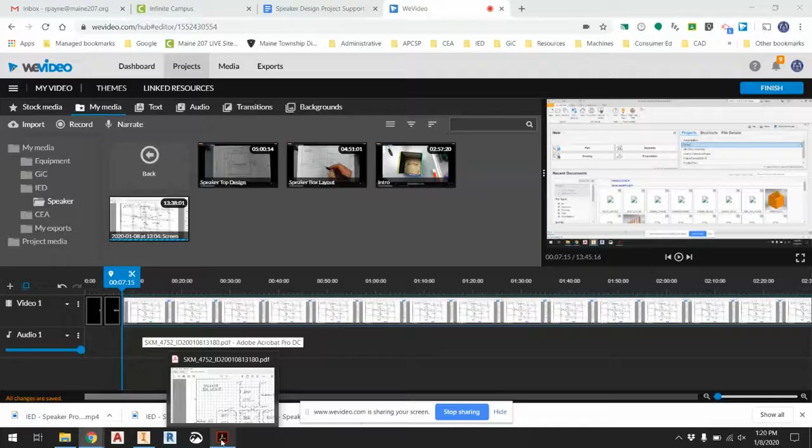All right, so at this point we have designed the bottom of our speaker box. Now we need to design one of the sides. So for mine right now, I'm going to do the front piece, my acrylic piece, which is kind of down here. So we need to start a new part. And first things first, start a sketch.

Just like all the other parts, every part is going to be 4.5 inches by 4.5 inches. All right. Again, keep in mind what part it is and what tool is going to be used. The acrylic is going to be cut out on a laser. So if I wanted to, I could finish this sketch, extrude it, and then kind of work in 3D.

If it's one of the HDPE pieces or the expanded PVC, it's going to go to the Carvey. It all needs to be done in the same sketch for when you export as a DXF and import into the Easel software. I'm going to just do it all in one sketch just to kind of show you how that's done. So instead of hitting finish sketch, I'm going to go back here.

I'm going to design it in this orientation, exactly the way I see it here, where it's kind of upside down, just to help me out and show you how all this works, and why there's this weird cutout here. The other thing to keep in mind is that this side here is flat. There's no cutouts, no finger joints in the top. That way we have a smooth surface top to our speaker box.

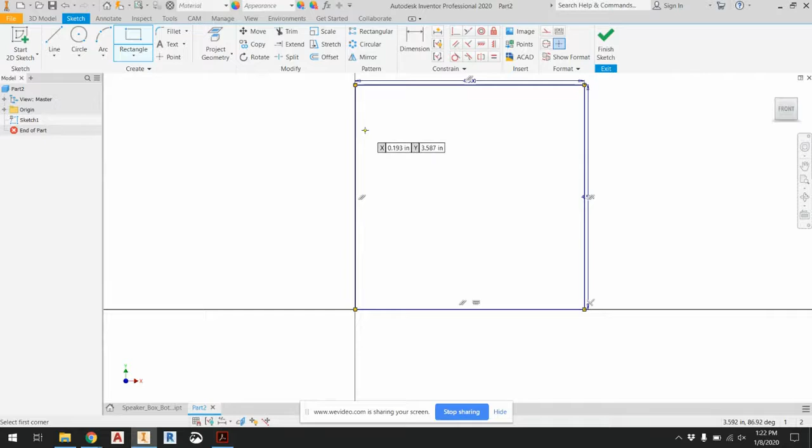So unlike the bottom where I didn't cut the edge, here on the sides, I do cut the edge first. So when I put in my new rectangle, I'm going to actually start with a rectangle in this corner and then go over, and I can dimension it immediately since I do know the dimensions here.

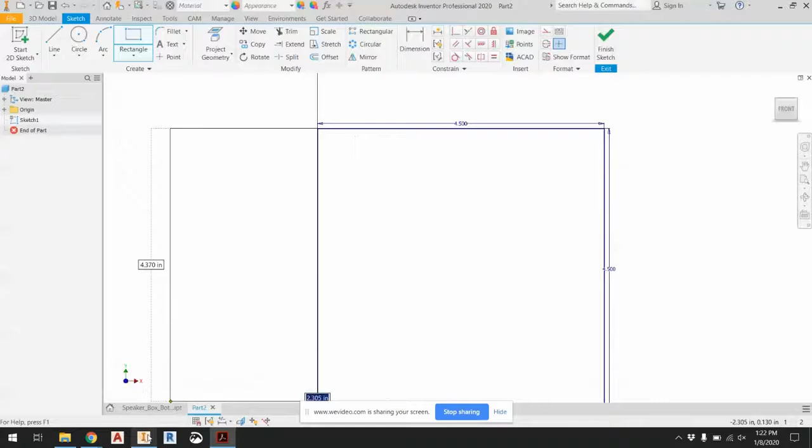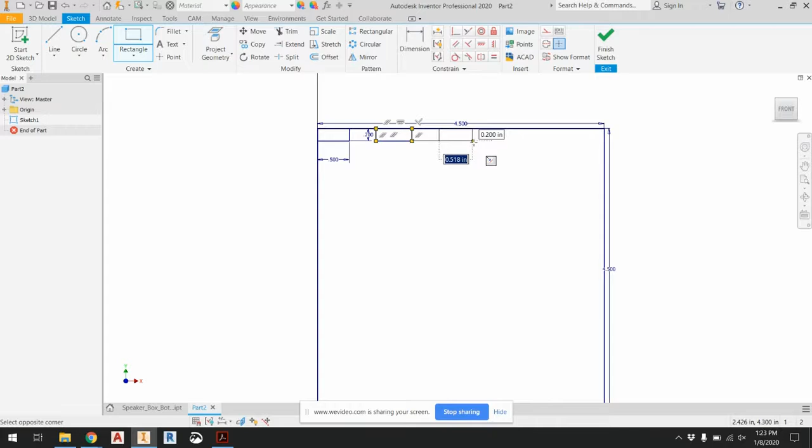I know that all my fingers are 0.5 inches across and the depth here is 0.2. So I can go 0.5 tab 0.2. Then I can put in another box. This one's going to be a random dimension, just match it up here, and then just keep going with these random ones. The only one that's not random is making sure that it lines up on the top part here. So there's 1, 2, 3, 4. And the last one goes right here, and that's 0.5, and then 0.2.

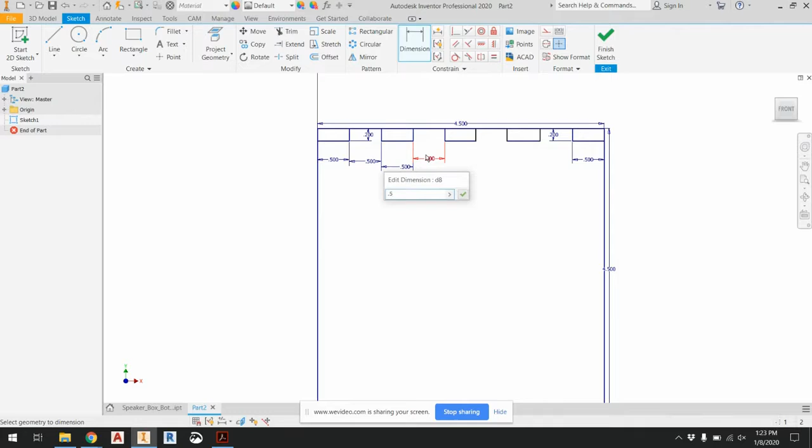Okay, so let's dimension all this stuff, make sure it's the way it needs to be. From here to here, 0.5. This is 0.5. From here to here is 0.5. This is 0.5. Here to here is 0.5. This is 0.5. And then here to here should just be 0.5 the way it all adds up, but I don't want to dimension that because otherwise it's going to be over-dimensioned.

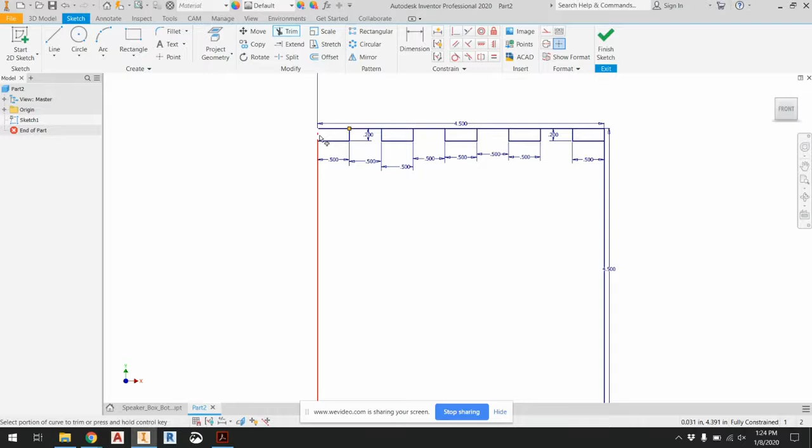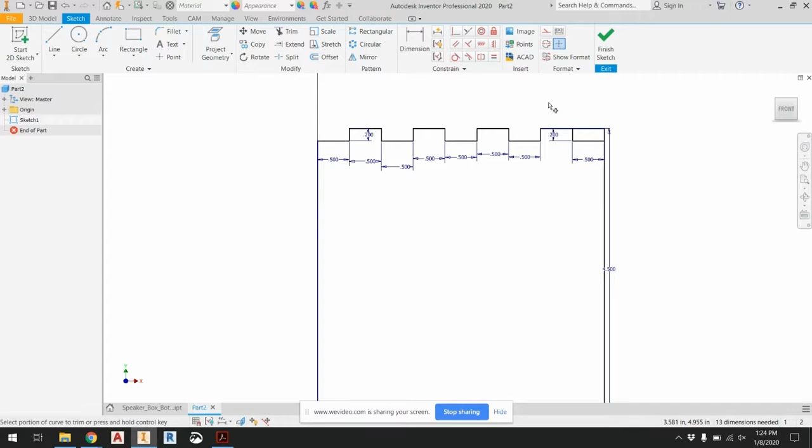Now you need to remove all the stuff that's not necessary. So I'm going to use the trim tool and trim away the stuff that's not needed. You see that gives me an error right there. So I trimmed some stuff, now I can just delete. I'm going to leave this part. Now I need to trim away that. Hit the trim command, trim, trim. Sometimes you have to hit twice if you have more than one line. If it's not going to trim, I just exit out of the trim command and hit delete. And then trim, trim. So always try to trim.

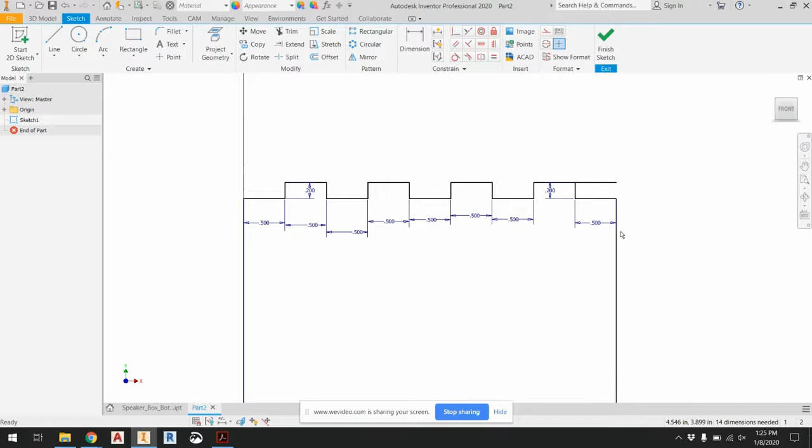Oops, undo. Let's see if this will trim. Oops, I don't want that. Why did that not work? Undo, undo. Let's try to do this again. Trim this. Okay, now trim that. Oops, something didn't work. Undo. Remove that. And then trim this. Okay, so it was having an issue with the dimension constraint. All right, so everything is good now. So now I have the fingers that go into the bottom.

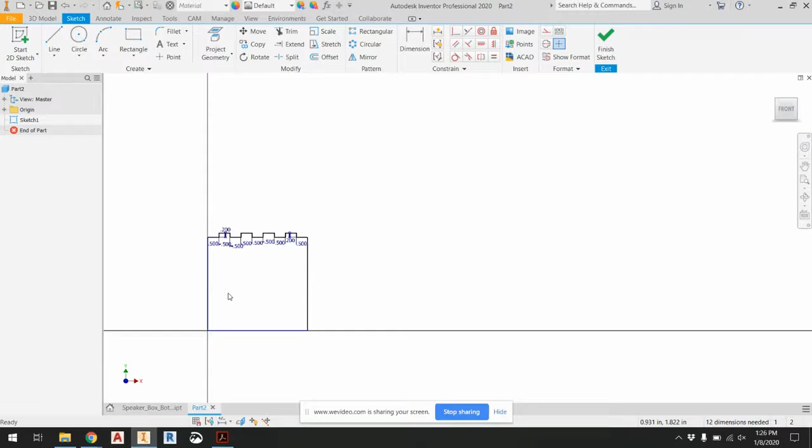Now I need to figure out the fingers that go on the right-hand side here. These fingers go into the HDPE tile, so that's why these fingers have to be 0.25 inches thick. I'm going to go from the quote unquote top of the box, which is really the bottom of the piece the way it's oriented right now, up. So on the right-hand side here, zoom out a little bit. It starts with an out piece, so the first cut is actually ½ inch up.

I'm going to start on this line, and it's going to be a distance of 0.25. That's actually where it snapped to, but I'm going to type in 0.25, and then a height of 0.5.

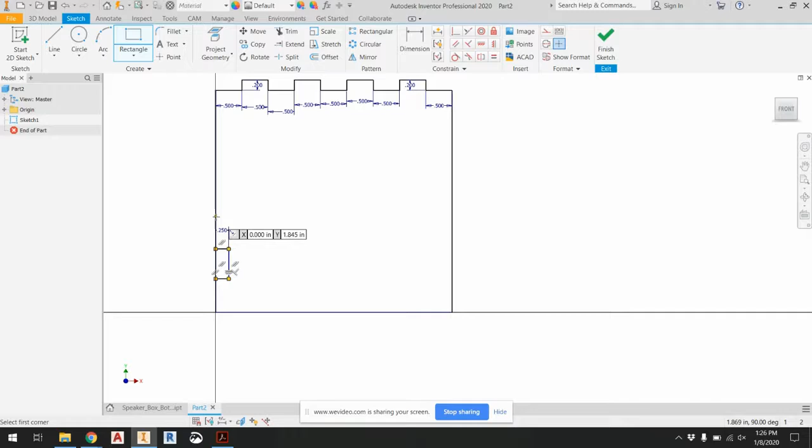All right, I'm going to do another one. 0.25, 0.5. Another one, 0.25, 0.5. And even one more, 0.25, 0.5. All right, now let's space these all out appropriately.

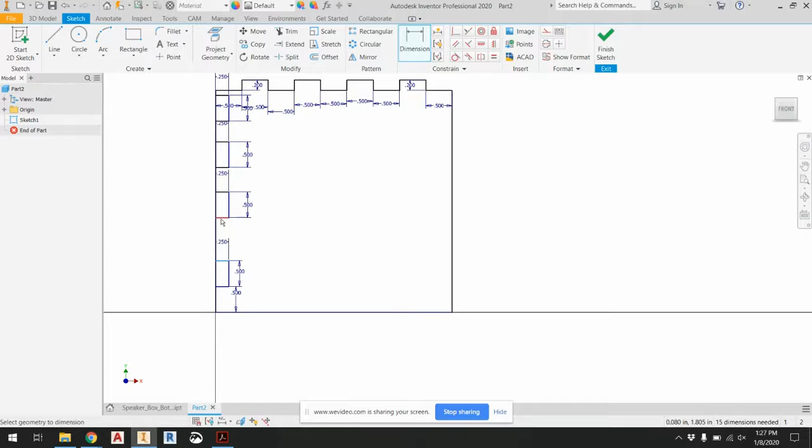Dimension from here to here should be 0.5. This should be 0.5. From here to here is 0.5. From here to here is 0.5. From here to here is 0.5. And now I need to actually just cut this stuff away. All right, so remember, these are the cutouts.

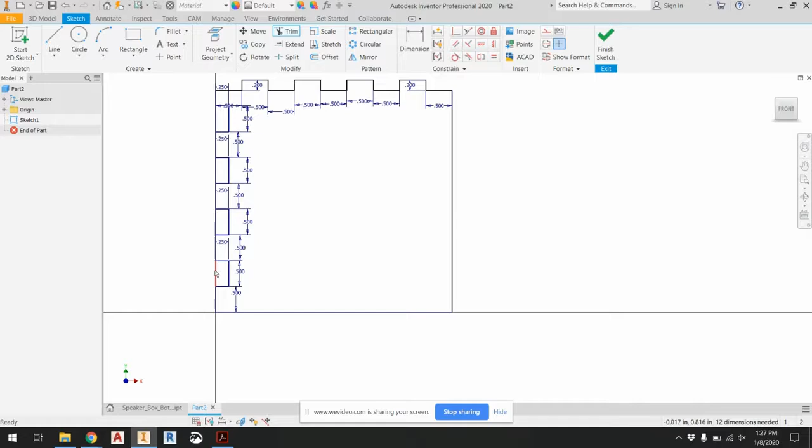So use the trim command, trim, and trim. Okay, it's not going to like that one, so escape out. Just click on it, delete it. All right, and then trim again, trim this, trim this. Oh, okay, hit escape, delete, trim. Up here, trim. Oh, okay, cancel. Delete. Oops, don't do that. Undo.

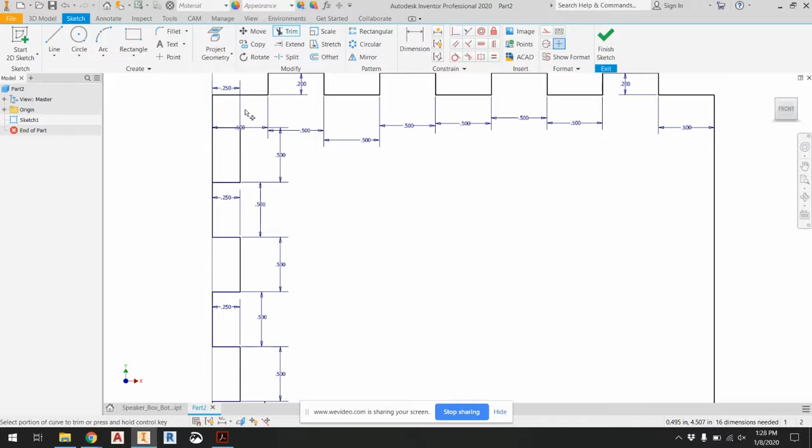So there you go, trim, delete that, and then trim. It's because you have overlapping lines. Some of it you can trim, the part that's like the bigger line you can trim, but if it's just the one side of the box, it won't let you trim it. All right, so there's that.

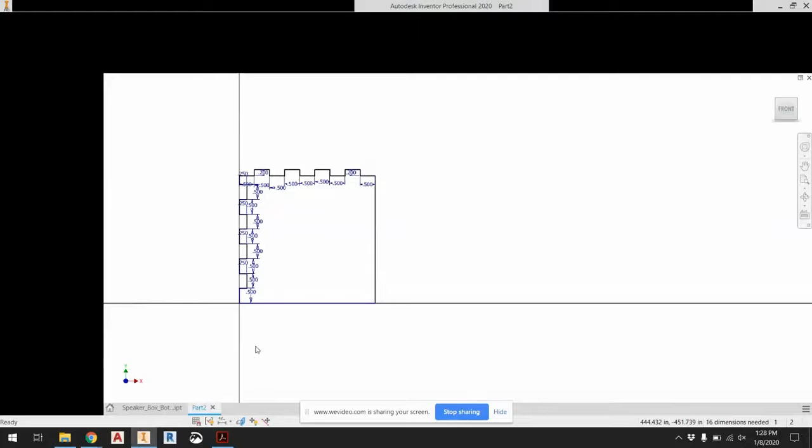And now I can, whoops, wrong thing, design this side. So again, the way the fingers work, they're the same height as the one on the other side, but the depth is different, the 0.125. All right, so go back here, some rectangles. So starting this edge, go up.

So it's 0.125, 0.5, 0.125, 0.5, 0.125, 0.5, 0.125, 0.5. So I've done 4 of them. It's 1, 2, 3, 4 cutouts. Good. So now it's trimming, which can be a bit of a challenge.

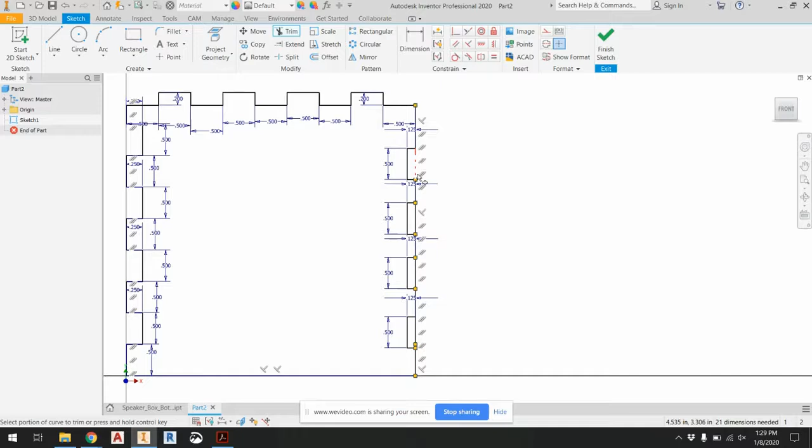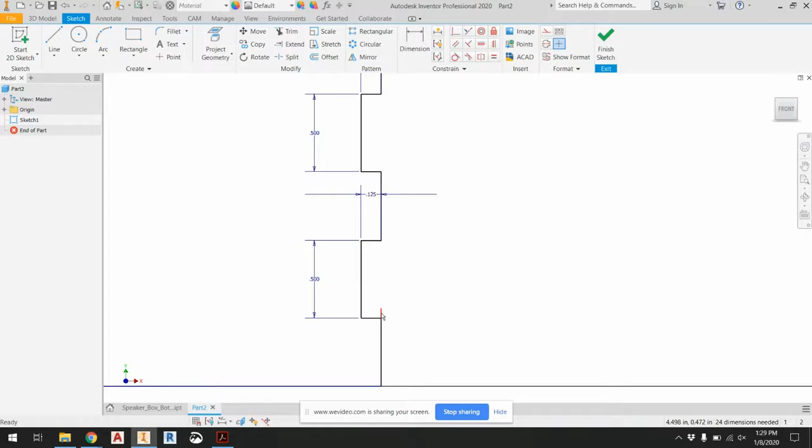So trim that, trim that, trim that. So trim that. So what I did is I just trimmed out the stuff, and now, whoops, that doesn't look like that trimmed the right way. Trim it again. All right, so now I can come back and try to delete that side of the rectangle cutouts. Oops, that did not trim correctly. It's always worth going back and double checking. Not sure why that little piece is left.

Either way. Oh, I didn't space these all out correctly. So undo all of those trims. Oops, okay, so redo. So I just realized I didn't go back and space them all correctly. So from this edge to here should be 0.5. It's not yet. 0.5, there we go.

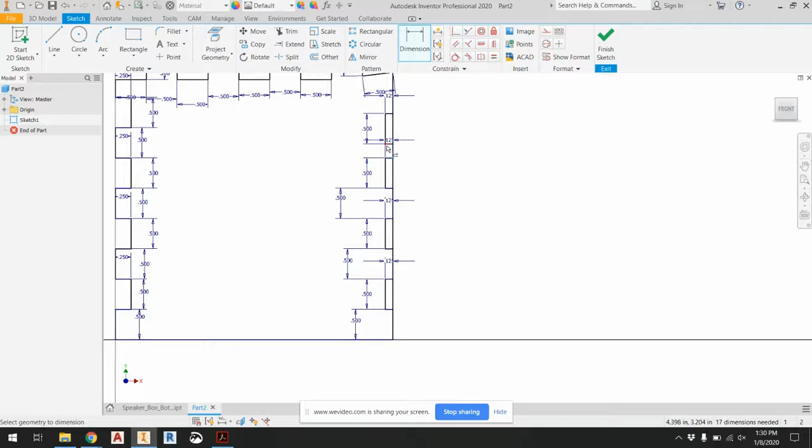From here to here should be 0.5. From here to here is 0.5. From here to here is 0.5. Looks weird. That should not be that way. All right, we're gonna come back and have to fix that later. All right, so let's try this trim stuff now.

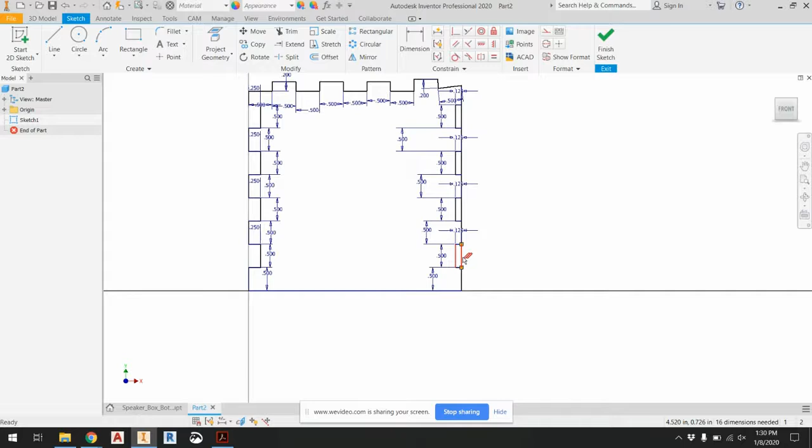Trim that, trim that, trim that, trim that. Okay, that's gonna have an issue. So I'll come back and delete, delete, delete, trim. Okay, and now delete.

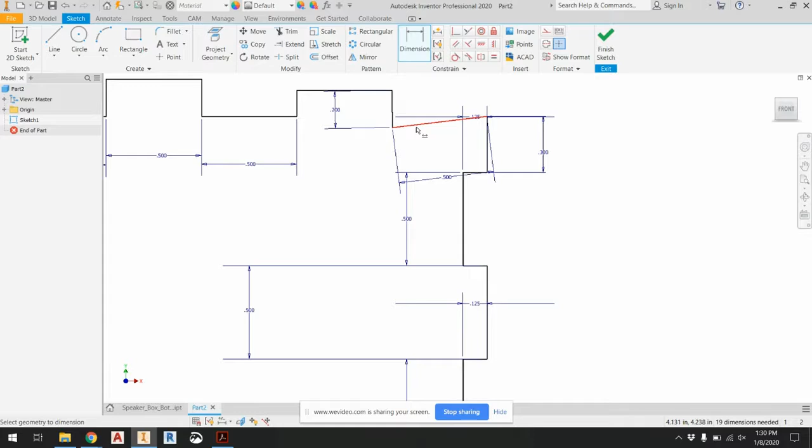All right, so in order to make this work correctly, let's dimension this. See, that's 0.3, so this one should also be 0.3 because it's all symmetric. At least this part is, so that should be 0.3. And that shouldn't have done that. Let's try from here to here, make that 0. There we go. And something's not working there. That's 0.5.

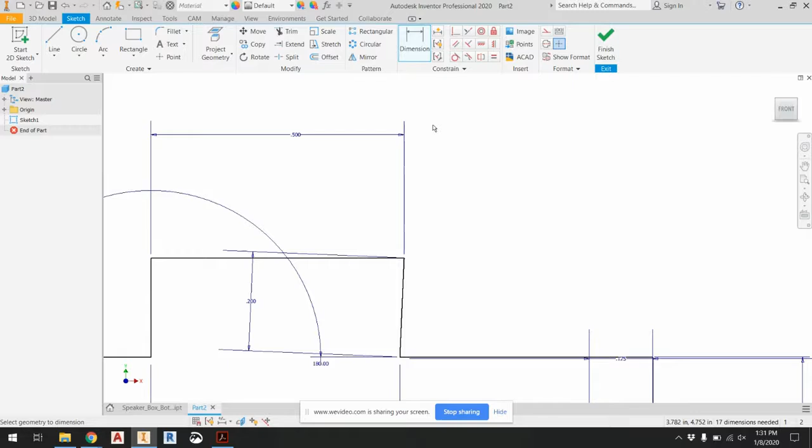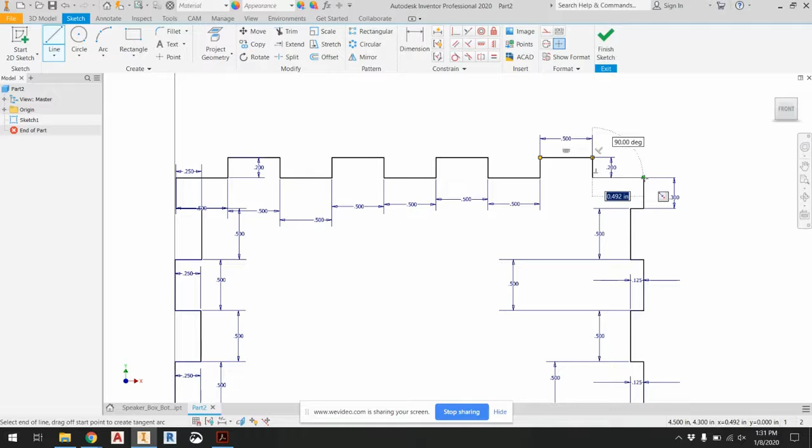Okay. Why is this causing me issues now? Don't know why. I'm gonna have to come back and redo some of this. All right, so let's just do some lines now. So that goes 0.5, down 0.2, and then directly over. All right, sometimes you just have to clean stuff up. Not sure why. Inventor does some weird stuff.

So the whole point, this is all done in one sketch. So now when I hit finish sketch, I should be able to extrude a thickness of 0.125 because it's the acrylic piece. Say OK. And then the other cool thing is you can actually make it look like acrylic. Oops.

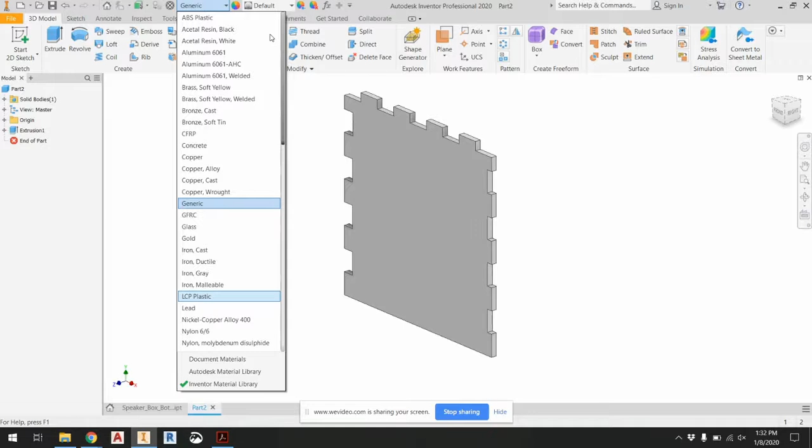So depending on what color acrylic you want, you can use like a clear blue, clear green, clear light, clear yellow. Might not have all the different types of acrylic we have because we do have quite a bit of acrylic, but if you put in a clear green, it is kind of clear, kind of like what the acrylic would actually look like.

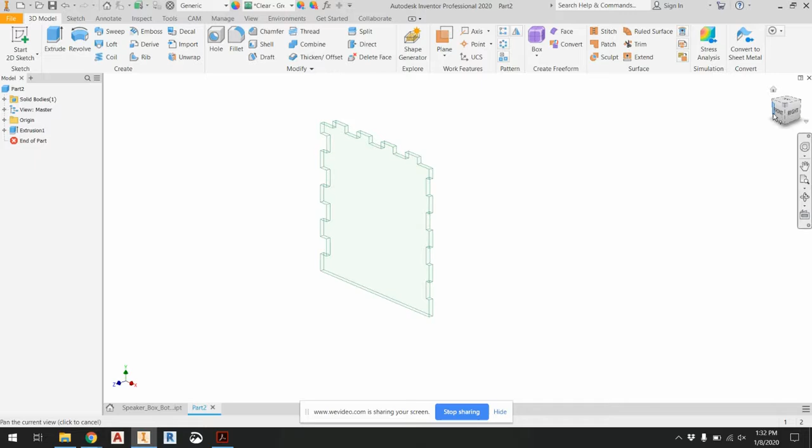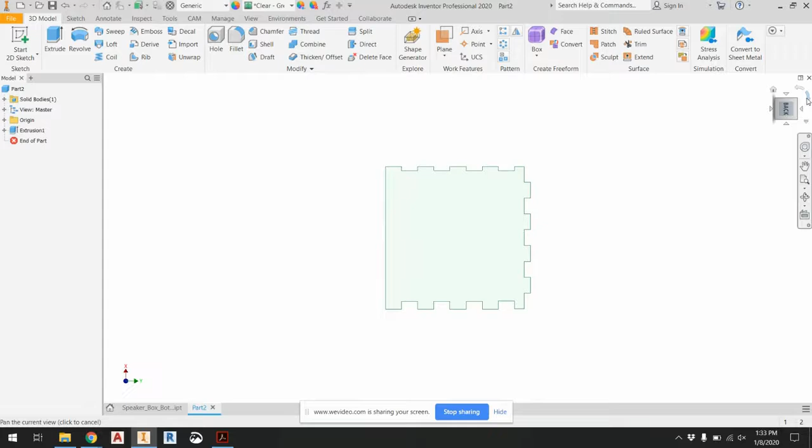So the other thing is just keep in mind when I click on the back, this is the inside. So imagine when you kind of fold this up, we're looking at the inside of this piece. So if you want to keep this as the orientation of your piece, that's good. Just know that when you actually get to the point where you want to do your design work, you have to do it on the back, and in order for the design to be facing upwards, you do it on the back and kind of have it reversed, and now you can do your design work.

All right, we're going to show that in a later video, but I just want to make sure you understand that. Let's go ahead and save this piece. Again, a descriptive name. So we do acrylic, so speaker, box, acrylic side. Save. Now make a multi-view drawing, full dimension of this piece, and you're done with this piece.